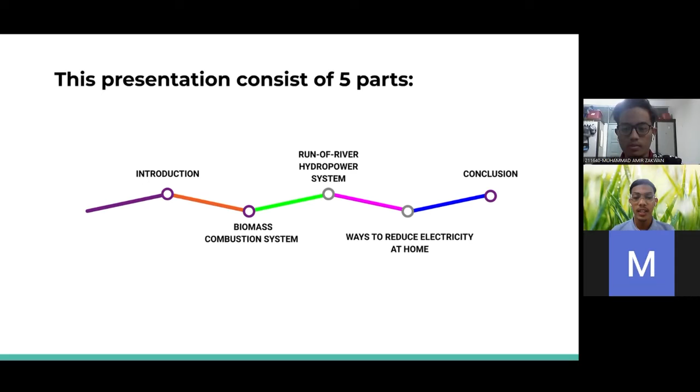As you can see in this slide, this is the general introduction of this presentation. According to statistics from World Data in 2020, the amount of electricity consumed in Malaysia totaled just below 143 billion kilowatt-hours. This clearly shows the importance of electricity in life for Malaysians and people all around the world.

Electricity plays an important role in both the production and consumption of goods and services within an economy. Electricity availability has been a major contributor to technological and scientific advancements that have raised the standard of living in many countries. There are several types of systems that can be used to generate electricity, either from renewable or non-renewable energy.

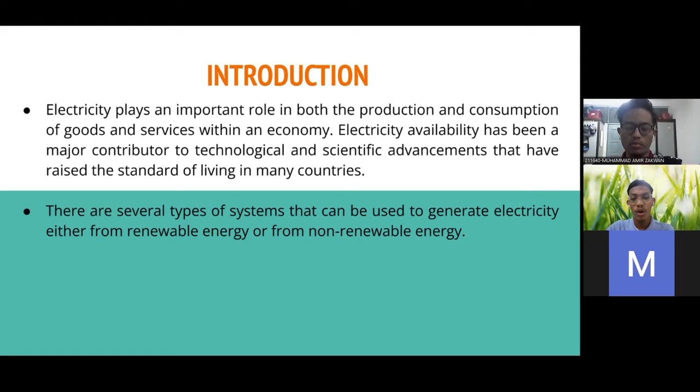There are 3 main objectives here. The first is to explain the general method to generate green electricity. Secondly, to discuss in detail the biomass combustion system. And lastly, to discuss in detail the run-of-river hydropower system.

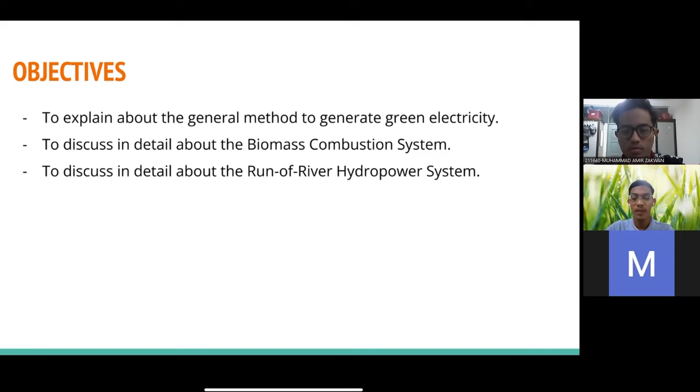Without further ado, I will pass this presentation to Amir Zakwan to briefly explain the two systems we have chosen. Go ahead, Amir Zakwan.

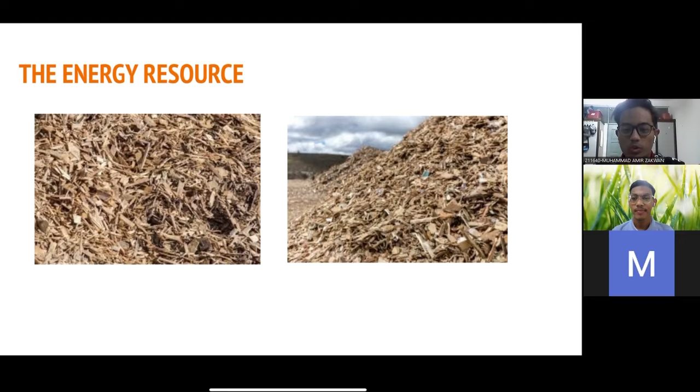Hello everyone. Today I want to explain in detail the biomass combustion system. To be more specific, I only want to focus on one energy source, which is wood chips. We will be collecting the wood chips from farms or manufacturers. So let me explain in general what will happen in the biomass combustion system.

Firstly, plant waste, which is wood chips, wood scraps, sawdust, and crop waste, will be collected from farms or manufacturers. Next, the waste is burned to heat the water, and the hot water creates steam. The pressure of the steam will spin the turbine. After that, the turbine powers the generator, and finally, the generator creates electricity. That was what happens in the system.

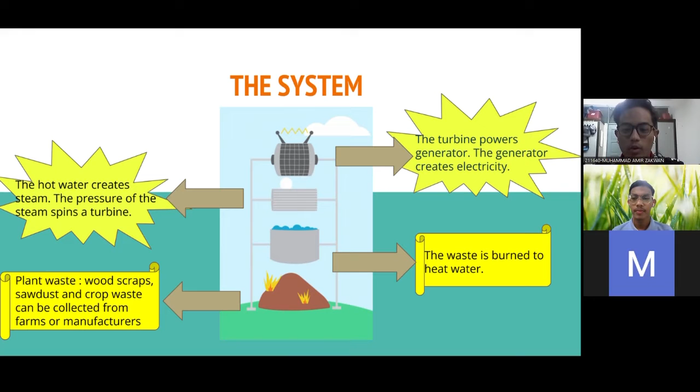So I will explain further how it works in real life. Firstly, the wood chips will be delivered by lorry and tipped into a feeding system. The feeding system, which is a chain conveyor, will transfer the wood chips to a furnace. In the furnace, wood chips are incinerated on a grate under controlled conditions and produce flue gases of about 1000 degrees Celsius that are let into a steam boiler.

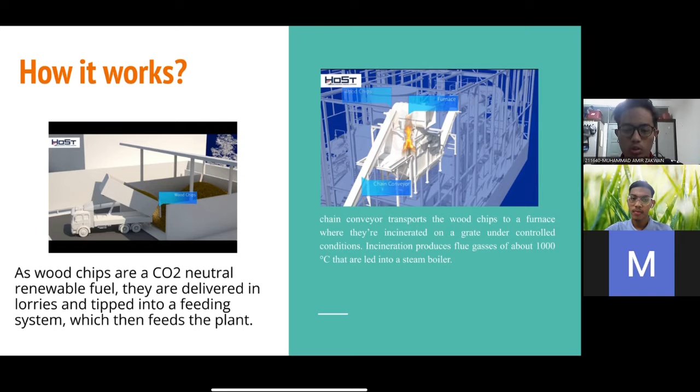In the steam boiler, the flue gases give off heat and are cooled to a temperature of about 108 degrees Celsius. After going through the boiler, the flue gases are cleaned.

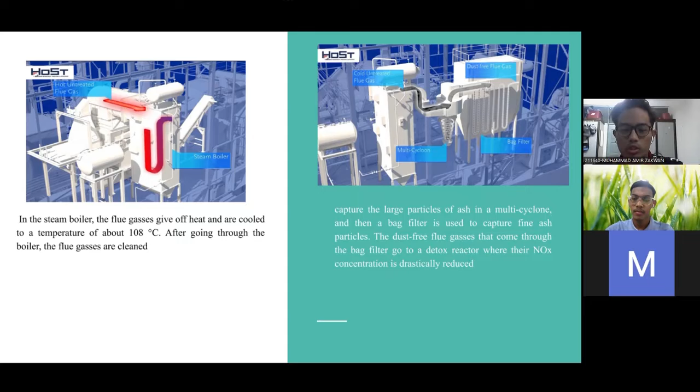The first step is to capture large particles of ash in a multi-cyclone, and then a bag filter is used to capture fine ash particles. The dust-free flue gases that come through the bag filter go to a DeNOx reactor where their NOx concentration is drastically reduced. The clean flue gases are then led through a flue gas ventilator and a flue gas condenser. The last remaining energy is extracted from the flue gases by further cooling them to about 50 degrees Celsius.

This step increases the plant's efficiency. The clean and cool flue gases are discharged through the chimney, and the heat the flue gases have given off in the steam is transformed into high pressure steam, which is led through a pipeline to a turbine.

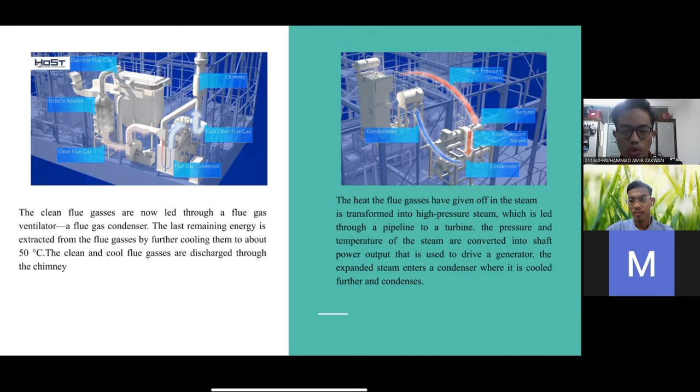In the turbine, the pressure and temperature of the steam are converted into shaft power output that is used to drive a generator. After the turbine, the expanded steam enters a condenser where it is cooled further and condenses, thus generating heat.

The heat released from the steam condenser and the flue gas condenser is introduced into a district heating system by means of pumps. A gas boiler can be brought online as backup or to meet high demand for heat. The green energy generated by the generator is fed into the grid as green energy.

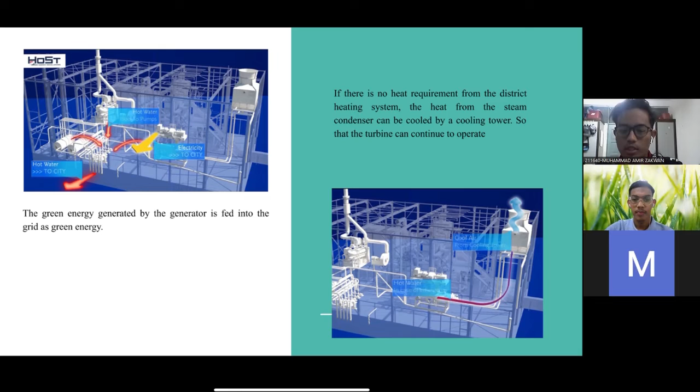If there is no heat requirement from the district heating system, the heat from the steam condenser can be cooled by a cooling tower, so that the turbine can continue to operate.

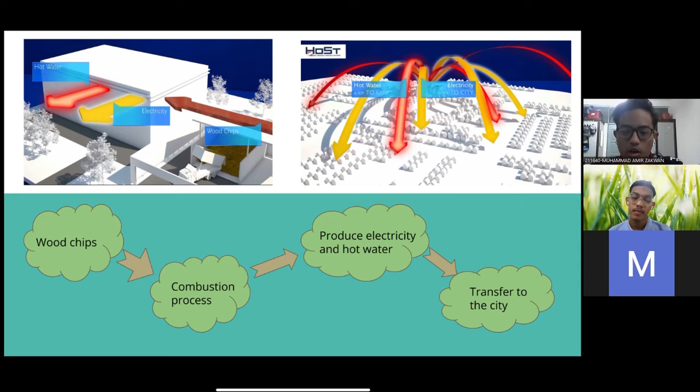So there are a few advantages of using this biomass combustion system, one of which is renewable energy. Biomass energy is a renewable source because of how it derives. It comes from organic matter such as crop waste, wood, and other specific resources that are grown to create energy. It comes from natural resources and waste products that are never ending and that we are continually producing.

Secondly, woodlands that are easily accessible for biomass energy to generate electricity. Unlike other renewable energy sources such as wind or solar, biomass energy is stored within the organism and can be harvested when it is needed.

There are also disadvantages, which include an increased risk of deforestation, because uncontrolled biomass production can lead to depletion of trees as humans seek more wood to convert to biomass energy. Secondly, biomass energy production requires a lot of space, money, and effort. It's quite expensive to create a biomass energy plant, and it needs a lot of space to be set up. Transport and other resource-gathering expenses are quite high.

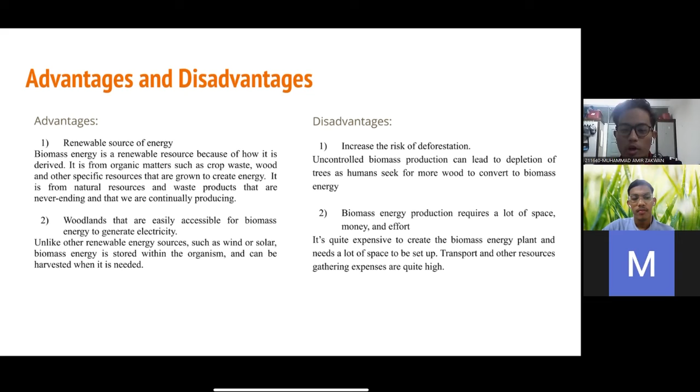So that's my explanation for the biomass combustion system. Now I pass to my partner to continue the presentation.

Thank you, Amir Zakwan. Now let's look at the run-of-river hydropower system. First, what is a run-of-river hydropower system? Run-of-river hydropower systems are hydroelectric systems that harvest energy from flowing water to generate electricity in the absence of a large dam and reservoir.

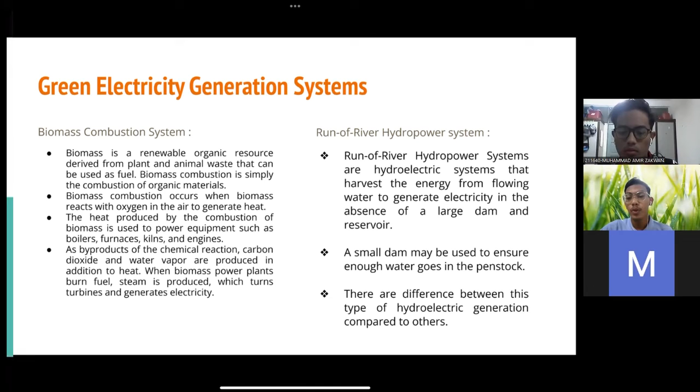A small dam may be used to ensure enough water goes into the penstock. There are differences between this type of hydroelectric generation compared to others. The system uses water as its energy source. Hydroelectric power plants are usually located on or near a water source.

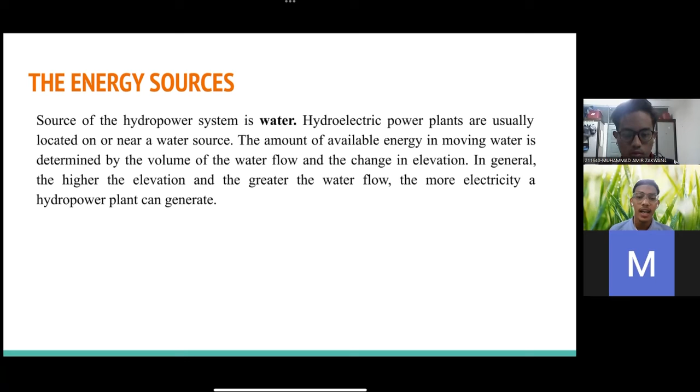The amount of available energy in moving water is determined by the volume of water flow and the change in elevation. In general, the higher the elevation and the greater the water flow, the more electricity a hydropower plant can generate. As you might think, how does this system work?

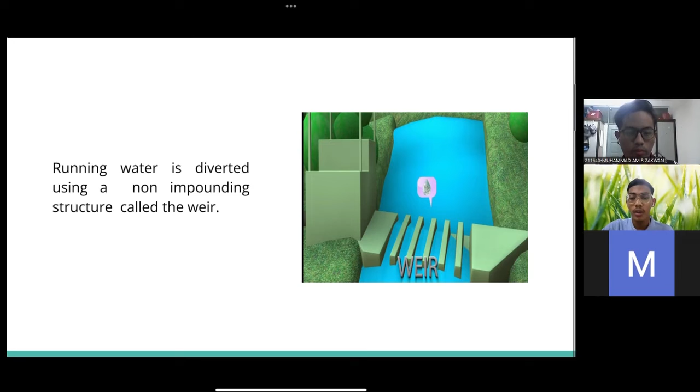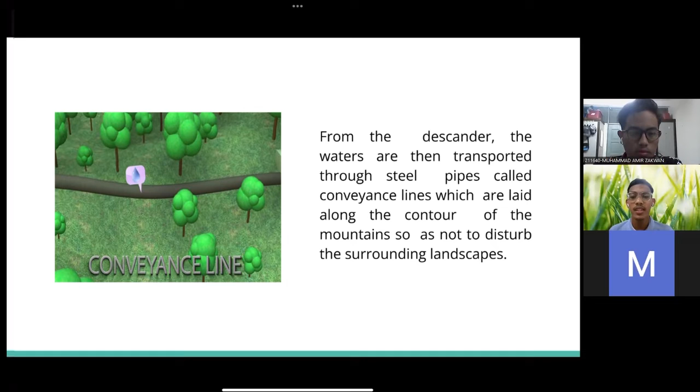Running water is diverted using a non-impounding structure called a weir. From the weir, the water enters a desander, where water sediment settles to the bottom. From the desander, the water is then transported through steel pipes called a conveyance line, which are laid along the contour of the mountain so as not to disturb the surrounding landscape.

Then the water drops at a steep angle through another steel pipe known as the penstock. The penstock leads directly to the power plant, which houses the turbine units, and the turbine causes a rotating motion, converting hydraulic energy to mechanical energy. Since turbines are directly coupled to the generator, this energy will be converted into electrical energy.

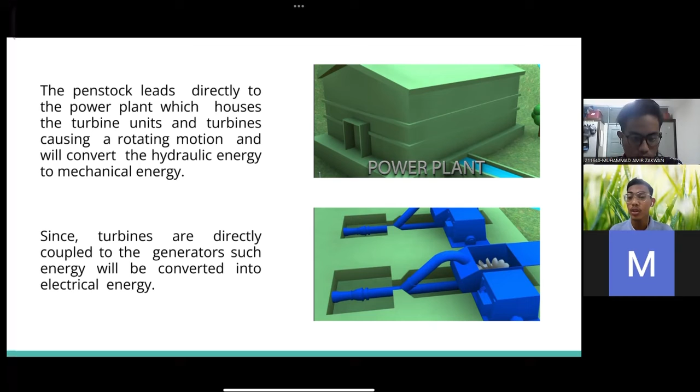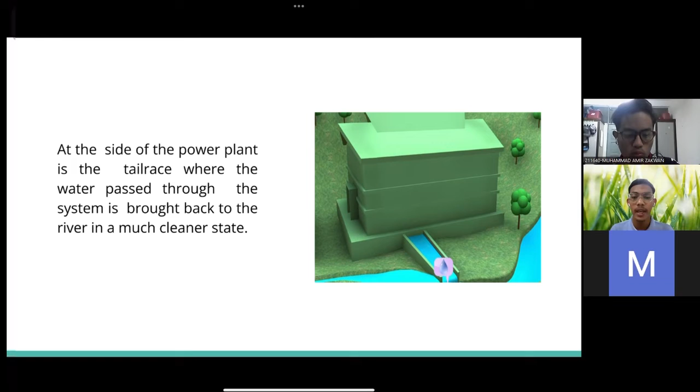The generator is in turn connected to a substation, where the energy produced is transmitted to the main grid. At the side of the power plant is a tailrace, where the water that passed through the system is brought back to the river in a much cleaner state.

Next, the system also has its advantages and disadvantages. The advantage of this run-of-river hydropower system is no relocation of people and natural habitats. Compared with hydroelectric dams, which need a wide area to construct and may cause destruction of habitat, the run-of-river system requires no reservoir, so people living near the river do not need to relocate, and natural habitats are preserved.

A second advantage is that it's environmentally friendly. The run-of-river hydropower system does not use any fuel, nor does it produce any harmful emissions, and it also provides a steady supply of clean energy.

As for disadvantages, the system produces unfirm power. Run-of-river power is considered unfirm power because this system has little or no capacity for energy storage and cannot coordinate the output of electricity generation to match consumer demands. It will thus generate more or less power depending on the location. Last but not least, the energy produced by the system is limited since it does not hold water as hydroelectric dams do.

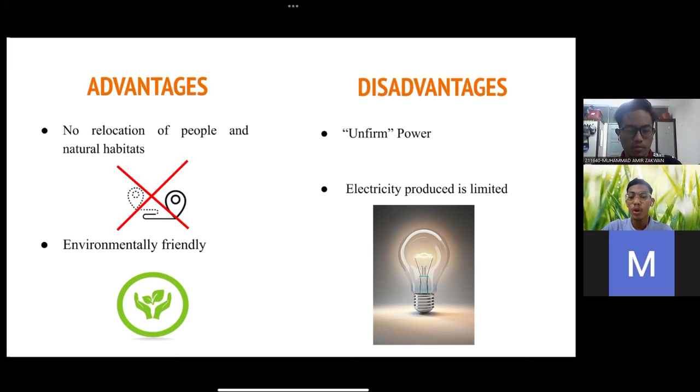Now let's move to the second-last part of this presentation, which is ways to reduce electricity use at home. Firstly, invest in energy-efficient appliances. Look for the Energy Star label, which is a federal guarantee that the item will use less energy. Second, open the refrigerator or oven door only when necessary to prevent cold and heat from escaping.

Then I hand it over to Zakwan for this presentation. So I will continue. The third way to reduce electricity at home is to shut down your computer when not in use. Computers are some of the biggest energy guzzlers.

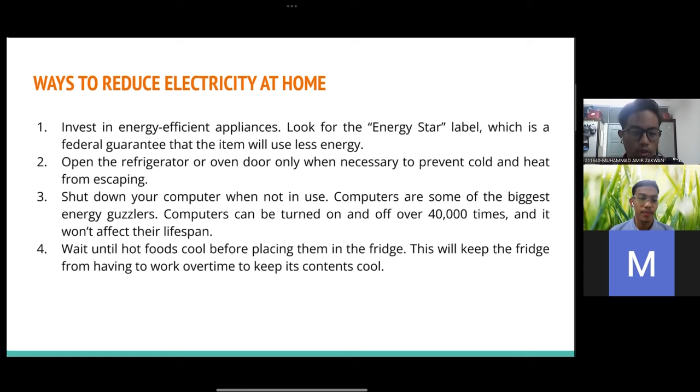Computers can be turned on and off over 40,000 times and it won't affect their lifespan. And last but not least, wait until hot food cools before placing it in the fridge. This will keep the fridge from having to work overtime to keep its contents cool.

Before we end our presentation, let me recap the two uses of renewable energy systems, which are the biomass system and the hydropower system. Energy plays a crucial role in modern societies. It is a vital input to all sectors and is essential to generate electricity. In other words, all societies require energy services to meet basic human needs such as lighting, heating, and mobility.

Let us begin using renewable energy because of the numerous benefits it can provide. Most of us rarely stop to think about what life might be like without electricity, because it is so necessary to our daily life and activities. Like air and water, we take electricity for granted.

We depend on electricity on a daily basis to power our televisions, computers, and lights, as well as to heat and chill our homes. So electricity is a convenient and controllable form of energy that is used in the application of heat, light, and power. That brings us to the end of our presentation. Thank you for listening.